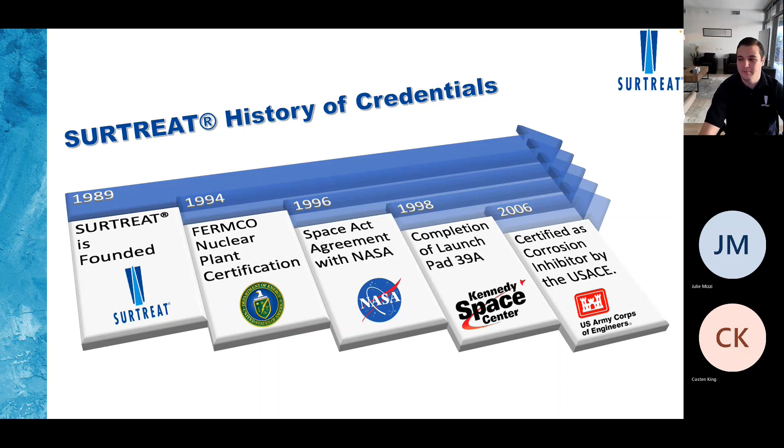Then in 1996, we started working with NASA through the Space Act Agreement, which led to the completion of Launchpad 39A in 1998. A few years later, we started working with the Army Corps of Engineers to develop a corrosion inhibitor based on the technology used through that Space Act Agreement with NASA.

That same year, we started a 10-year study with NAVFAC at the Okinawa-Kadena Air Force Base. That would be the foundation for us getting into the UFGS specification.

In 2010, we started working with the New Jersey DOT to get specified in the Bridge Preventive Maintenance Program, which is what we're going to be discussing today. We also got our international certification in the European Union in 2011.

After those 10 years and the results of that Okinawa 10-year study, we were included in the UFGS as the only system that can meet the surface applied corrosion inhibitor guideline. In 2019, our founder Bob Waldy worked on an ICRI committee, and currently we are the only three-part system that can meet that surface applied corrosion inhibitor guideline.

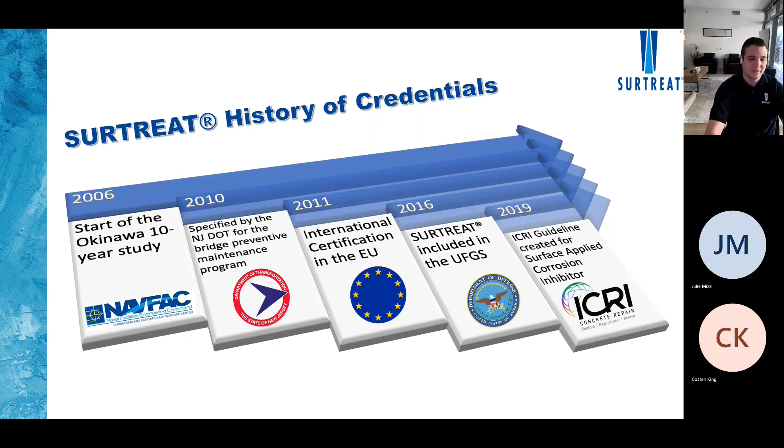So this is our story. Now I'm going to tell you what makes us different. What makes us different is that, like I said, we're a turnkey solution, chemically based approach to life extension of concrete.

So when we have a project, we look at what the problem is. Then based on that problem, we create a diagnosis, which will lead into us developing a solution. We'll design a solution for that specific problem, then we manufacture it based on the solution that was designed.

We provide all the on-site inspection and all the training necessary so that the solution gets installed properly. We do the testing and monitoring after it's installed to verify that the performance was met. All of these steps lead to the structure being healthy and the concrete being healthy, and this is why we can ensure the life extension will happen.

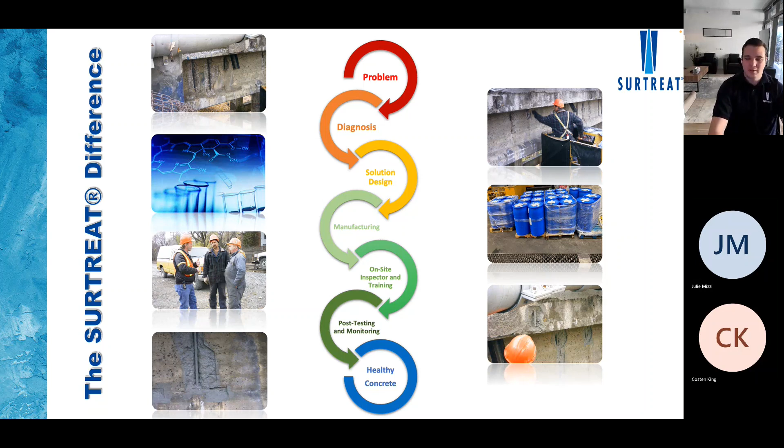Now let's talk about what's going on with bridges and infrastructure in general. It's clear that our infrastructure is in need of rehabilitation. The Federal Highway Administration posts a report annually. The most recent one shows there are 4,783 structurally deficient structures. Structurally deficient structures are a big pain for the Highway Administration.

They estimate it would cost $16 billion to rehabilitate those 4,783 bridges. This is not even replacement - if they need to replace them, that would be $24 billion. So they need to spend at least 68% of what it would cost to replace them just to get them rehabilitated and out of that structurally deficient status.

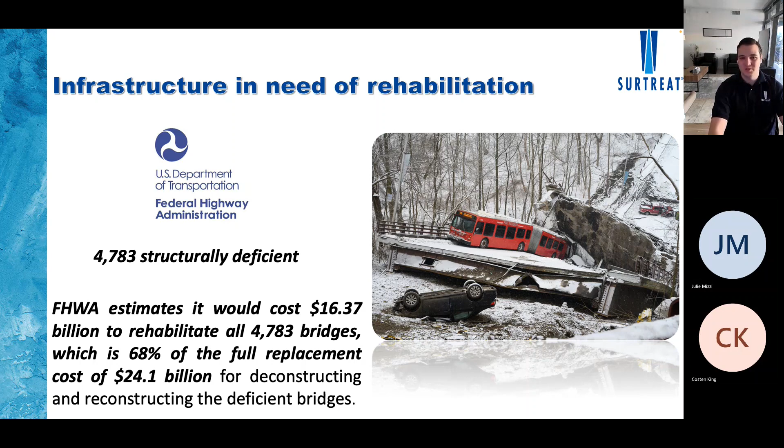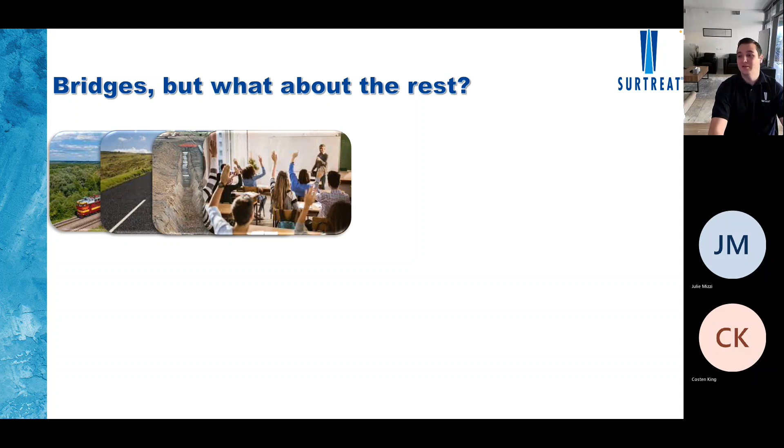Now, that's only bridges, and it doesn't even include the cost of rehabilitating bridges maintained by states and localities - just national bridges. It doesn't include railroads, highways, pipelines, schools, public works, pipes, ports, dams, public buildings, or airports.

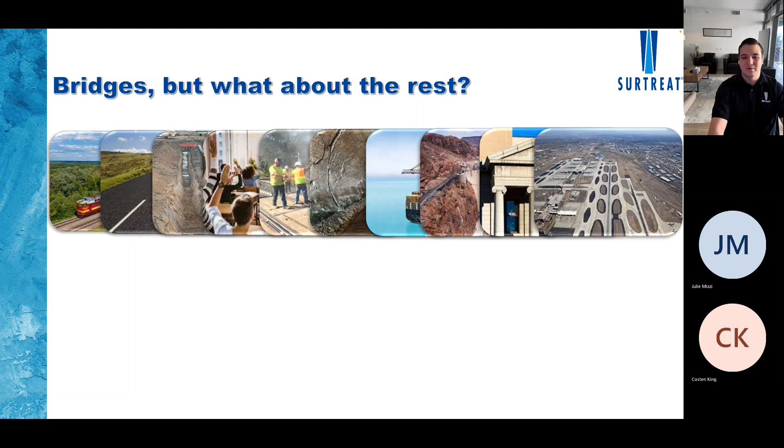And that is why the American Society of Civil Engineers assigned us a grade of D plus on the nation's overall infrastructure. So we have a long way to go, and it's going to take a lot of money.

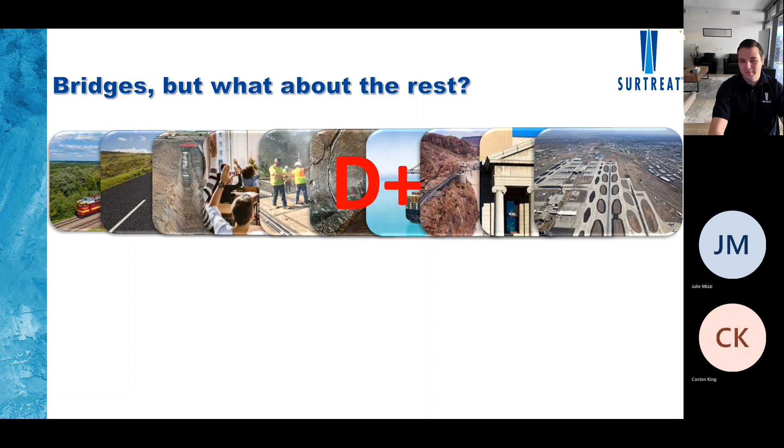That same organization, the ASCE, estimates that we need to spend $4.5 trillion just to get the infrastructure going. According to some Harvard economic professors, and actually the former Secretary of the Treasury, Larry Summers,

there's an estimation that the state of the infrastructure right now is costing households 50 cents to $1, like a tax per gallon of gasoline, just because of traffic and extra repairs. According to the ASCE, it's costing us $3,400 per year on auto repairs, extra gasoline, and time stuck in traffic. So it's not only hurting commerce, it's not only hurting the cities.

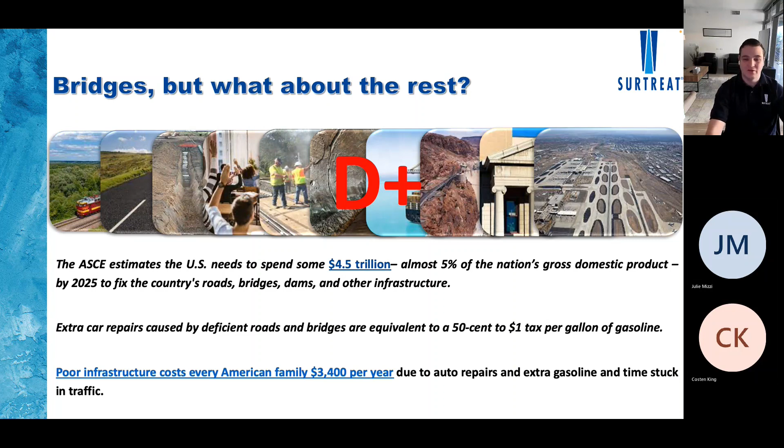It's hurting people, regular people. Now, why is this happening?

The main cause of concrete deterioration is corrosion of reinforcing steel. When reinforcing steel starts corroding, the corrosion creates tensile stress on the rebar and on the concrete. As the corrosion expands, the concrete gets that expansive tension and starts cracking and delaminating. Once that happens, it spreads throughout the rebar.

Once concrete has been deteriorated by corrosion, it's going to take more time and more cost to repair. It's important to know that if corrosion is present in concrete, the concrete is compromised.

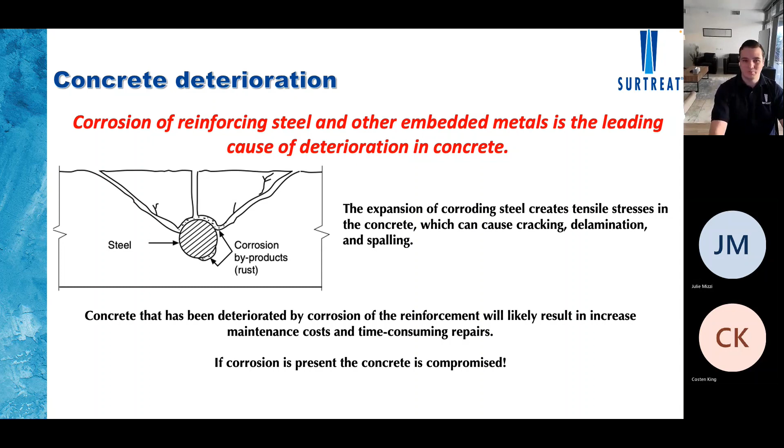To this point, what we've been doing is just patching. We see a spot that's corroded, some spalling happening, and we just patch it and think it's a repair. But this couldn't be farther from the truth. What's happening is that you're putting a new patch, new concrete with high pH and nice reinforcement, alongside corroded rebar or bad concrete that's contaminated with chlorides.

What's happening is that corrosion on the sides or in different areas migrates back to that patch, so the cycle is repeating. Unless you treat the corrosion occurring in the rebar, you're going to have the same problem over and over again. And this is going to lead to increased costs.

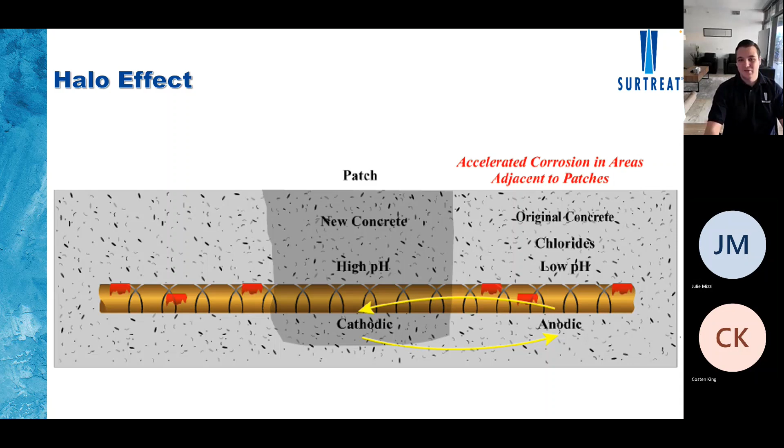One example of replacement versus trying to treat the underlying condition is the rehabilitation of the Washington Memorial Bridge. This bridge is steel, is concrete, is everything that we can treat. When a structure like this is left for a long time without proper maintenance, without treating the underlying cause, you get to a point where you have to do a big replacement project, and that costs time and money. In this case, it cost 3 years of disruption and a $227 million bill.

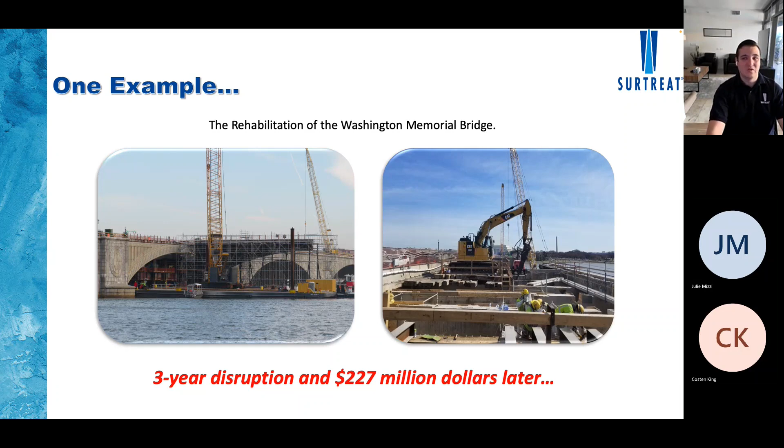It was closed, only one sidewalk, one lane for traffic for 3 years, disrupting morning and evening commutes. You can see it's a very, very significant project.

Now, I'm going to paint a picture. Imagine if we could have done this in 3 months and for a tenth of the cost. How do we do this? Well, we do this by not having to take down the whole structure and then putting it back on.

Because again, we're a surface applied, chemistry based approach, not a band-aid. We're not going to take the same amount of time. We're time efficient because it's a migrating technology. We migrate through the concrete all the way to the reinforcement. You don't need heavy equipment or heavy machinery, so it's cost efficient. You don't need to bring in new concrete, so it's environmentally friendly.

With our products and technologies, we can do as many as 10 other bridges for the same cost that the Washington Memorial Bridge took, and we can do it at a fraction of the time with much less traffic disruption. So let me explain how this technology works.

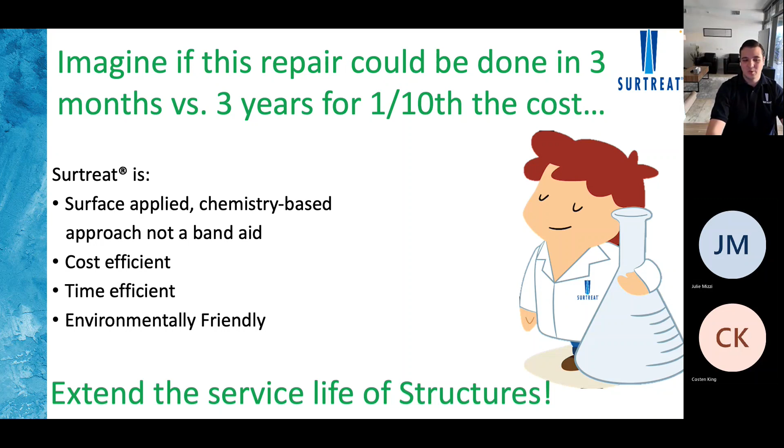Our technology works because concrete is very porous, which means that chlorides, air, acids, water, and other chemicals are able to permeate through the gel pores and microcracks all the way to the rebar. They settle in the rebar and around the rebar, which causes the pH to drop.

Once the pH drops, you lose that passivating film on the rebar that's protecting it from corrosion, and it starts to deteriorate. The environment around the rebar starts to deteriorate. The corrosion starts setting in, starts delaminating that concrete, and eventually you get those big spalls and delaminations.

So what we do is migrate through the concrete, through those same gel pores. The first thing our product or solution does is regenerate that passivating film, taking that active rust that's in the anodic stage and making it non-reactive, making it inert.

Then our technology also migrates through the gel pores and starts binding with the free calcium, which displaces any contaminants, acids, water, or chlorides that are there. It also turns those chlorides into an inert state so they're no longer water soluble. Once you do that, you basically prevent the process of the pH dropping again.

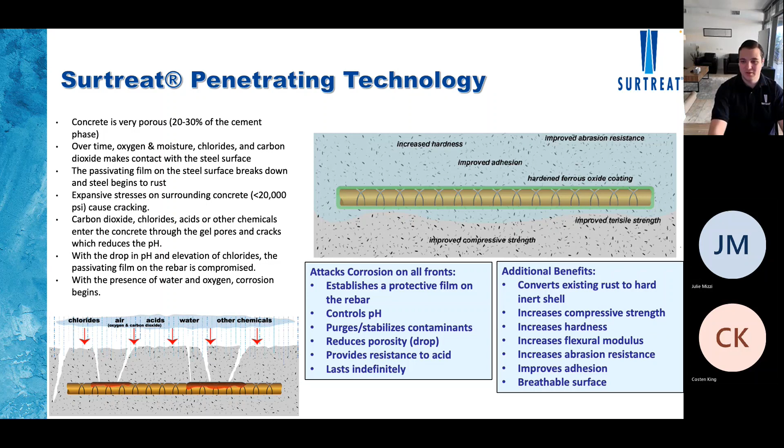Now, why is this important? What's important to extend the service life of structures? If we have a current structure that we're working with, and we take it down and rebuild it, the same thing is going to happen again. If you don't protect that structure, same thing. But what if I tell you that we can protect the current structure and make it better, so you don't need to do demolition?

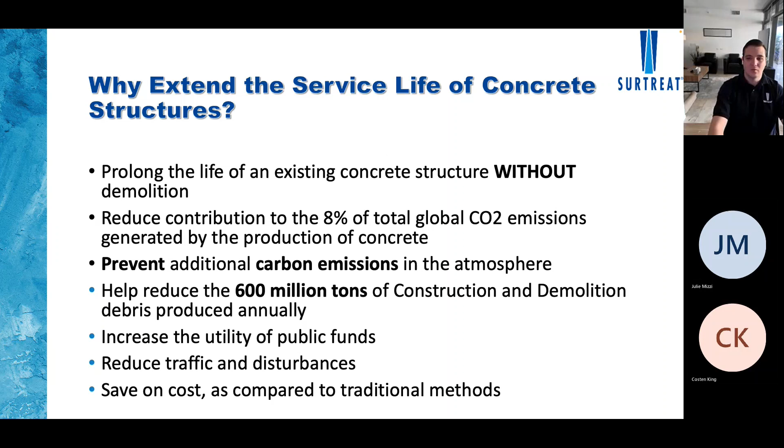You will also increase the utility of your public funds because you'll be able to do more bridges faster. You will reduce traffic and disturbances because our system is non-invasive, and you will save on cost compared to traditional methods. So an example of this cost saving, I want to take you back to this study that the US D.O.T did in 2017.

They studied the difference between replacing and repairing bridges. They took basically all the bridges that are in the NHS, which is a national highway system, and the non-NHS system that are structurally deficient. That means that they are in need of repair within the next year or two. And they found that overall, repairing is 32% cheaper than replacing.

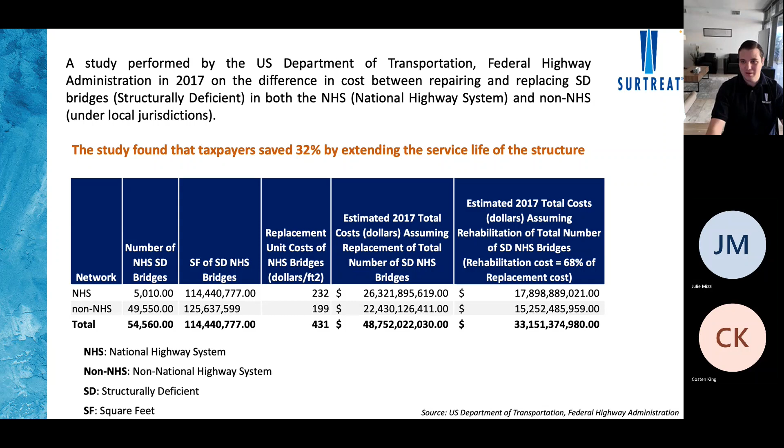Obviously, right? But what if I tell you that there is even a cheaper way to extend the service life indefinitely? Those repairs will be effective. You will be indeed repairing the structure, and you can make it even cheaper than what they estimated, so you can bring a higher benefit to the taxpayer.

These are just some case studies where we compare what the engineer recommended would cost versus what it actually cost us to repair that structure. It goes from 60 to 80% savings, which is significant when you think about it in public funds.

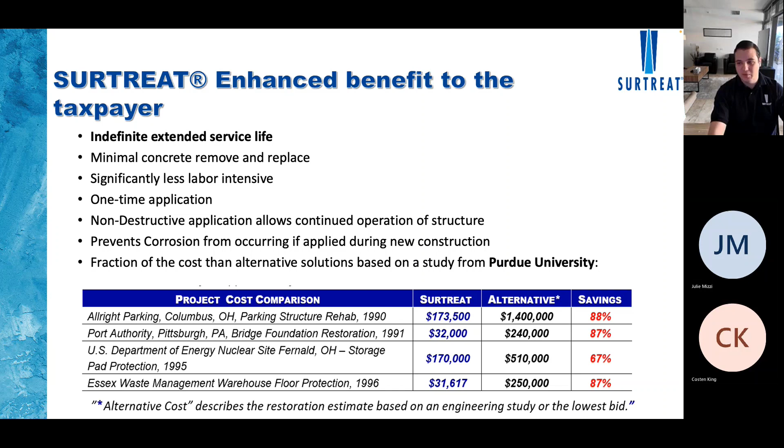So let me walk you through that UFGS specification that allows us to work with Department of Defense. That was the 10-year study that I mentioned at the intro of our presentation.

This basically, after 10 years, demonstrated that there was an average reduction in corrosion rate by 80%. But what this means is not that we reduced the corrosion rate by 80%. It means basically that we reverted the current process of corrosion. At the point where we were able to get this study after 10 years, it proved that there was no corrosion occurring. So that's what got us into that UFGS specification, and that's why we're the only system that meets it.

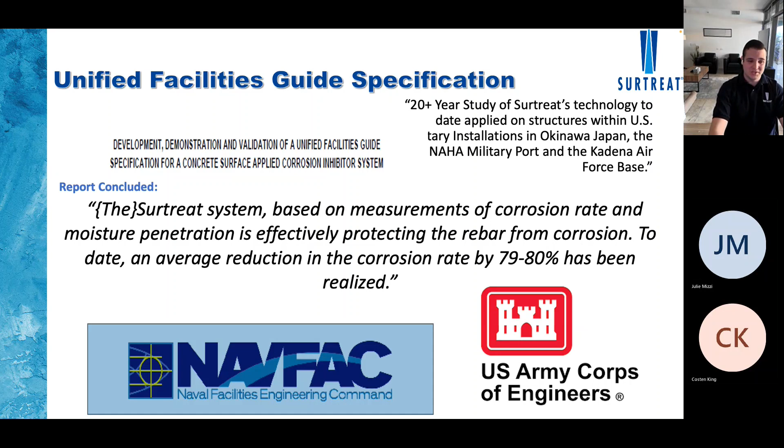And at the end, we're going to discuss some of the projects that we've been doing with that UFGS.

This is also our ICRI guideline. This is very important as you are looking into bridge deck and maintenance programs, because this is the only true way that you can, even before you do any repair, before you do your concrete repair, before you do FRP, before you put pavement again, make sure that the structure is clean, that the structure is healthy, and that the structure is not going to continue to deteriorate. This guideline is critical for people specifying our products, because it tells them exactly what they need to do, how they need to do it, and the performance required. You'll see that our solutions are the only ones that can meet those performance requirements.

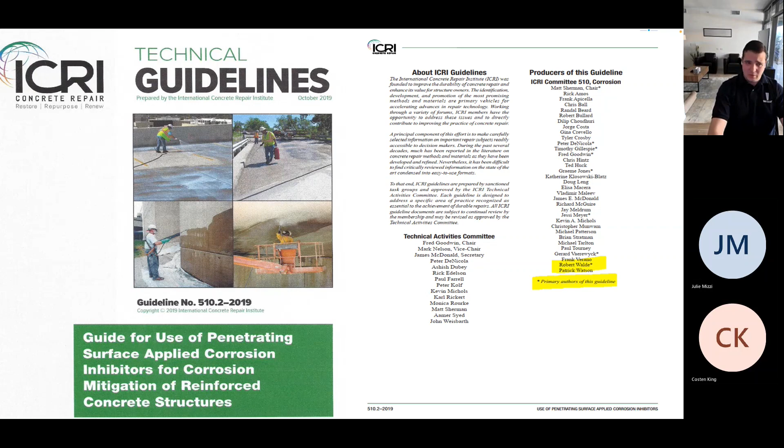So after this introduction of the problem and the current state, let me walk you through the New Jersey D.O.T maintenance program, which is one of our success stories in this bridge maintenance program.

New Jersey D.O.T has 39,000 miles of public roadways, 3,000 miles of state and U.S. highways, and 500 miles of interstate highways. They have so many structures, and they started this maintenance program when they realized they needed to develop something that was going to be cost effective in the future, and not necessarily break the bank every time something happens. So it was created in 2007 using state funds, and in 2009, the FHWA took notice of the efforts and expanded it to be a federally funded project.

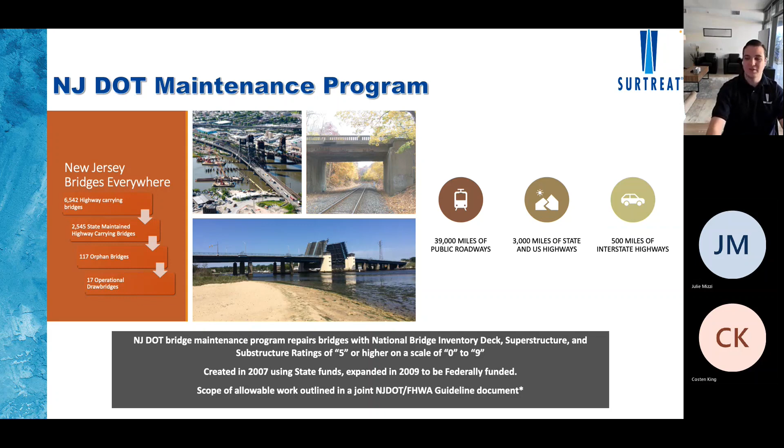Now, what they do is repair bridges that, within the National Bridge Inventory deck, superstructure and substructure, have a rating of 5 or higher on a scale of 0 to 9. So things that need repair within the next 4 years. Because of their involvement with FHWA, since it's federally funded, this scope is allowable work outlined in a joint New Jersey DOT and FHWA guideline document.

So the work we've done preventing corrosion has been significant. We've been able to reduce work orders, patching and potholes and all that, from 20,300 to 5,100. We've done over 400 structures, which is over 4 million square feet.

For those of you wondering how easy it was to install, this is how easy it is. All you need to do is make sure you get the right square footage so you get the right deal. It takes one lane, the other lane can stay open. Simple as that. You'll see cars passing by while you're effectively extending the life of your structure.

Now I'll tell you a little more about the story with New Jersey DOT. Our partnership with New Jersey started in 2003, when Surtreat began a testing program for 4 bridges that were to receive deck treatment. We started with non-destructive core testing before and after Surtreat, and sent those results to the University of Florida, where they analyzed the results before and after. We left control areas untreated in the deck just to measure the change.

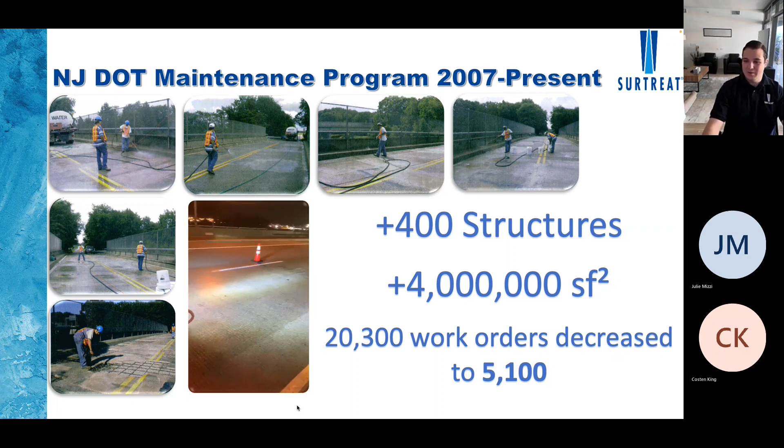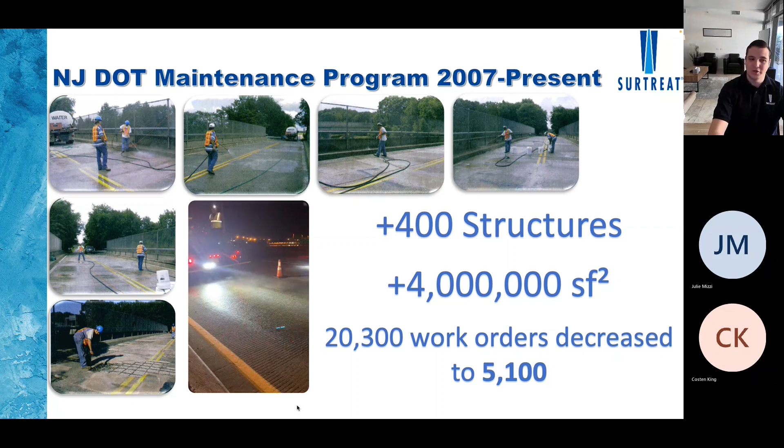The test results indicated that the application of Surtreat had a notable positive effect on the properties of the concrete deck. It increased the strength, decreased the permeability, and decreased the corrosion rate of the structure. These 3 factors are what allow us to say that we effectively extend the service life, and that our products are permanent. Once you change the chemistry of the concrete, there's no coming back. You can't damage that. The porosity is closed, and no chlorides can come in. Because no chlorides can come in, the corrosion rate can't revert, because you already have that passive state on the rebar. So there's effectively no way of returning to what was occurring in the past.

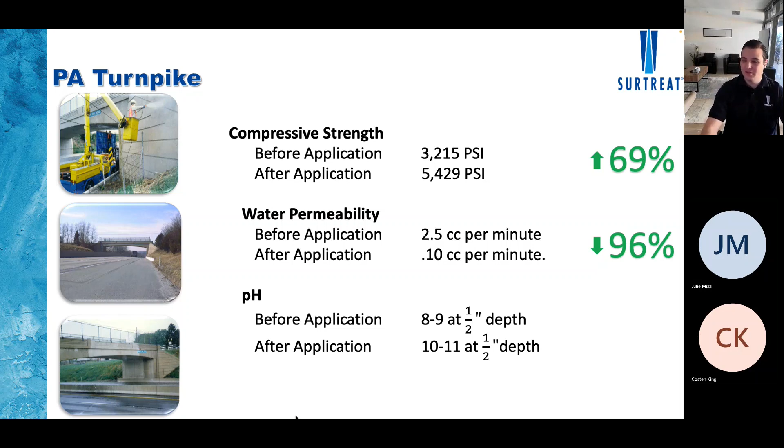So, increasing compressive strength by 69%, reducing water permeability by 96%. That's porosity, the thing that allows chlorides to come in and damage the concrete. And it increased the pH from 8-9, a corrosion-active state, to 10-11, a corrosion-passive state. So basically at that point, the rebar cannot corrode.

This is a more recent case study, from last year, where PennDOT had a bridge that needed FRP reinforcement. For those who don't know, FRP reinforcement is a surface-applied structural reinforcement that adds capacity to a structure. So if you need to increase loading capacity, you can apply FRP, but FRP has certain parameters. You cannot install FRP on a structure that has under 200 psi pull-off strength. You need to ensure that whatever is happening underneath the FRP, the structure you're repairing, doesn't have corrosion, because if it has corrosion, it'll still deteriorate, it'll pop, the spalling due to corrosion will pop out the FRP.

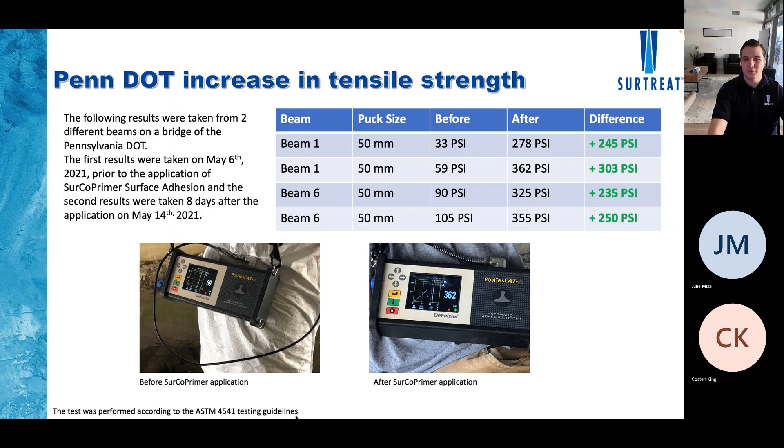So we needed to treat that. We applied it on 2 different beams, using our Surtreat technology, our SurCoPrimer, and after the application we saw increases of 245, 300, and 250 psi, which then allowed the structure to be repaired with FRP. So there are many benefits to treating the structure. Like I said, if you have a healthy structure, any repair you do will result in a good repair. You have to make sure the structure is healthy before you even think of repairing it.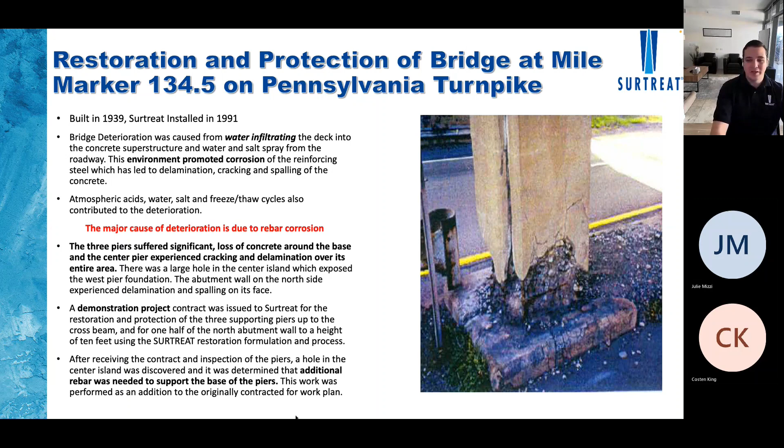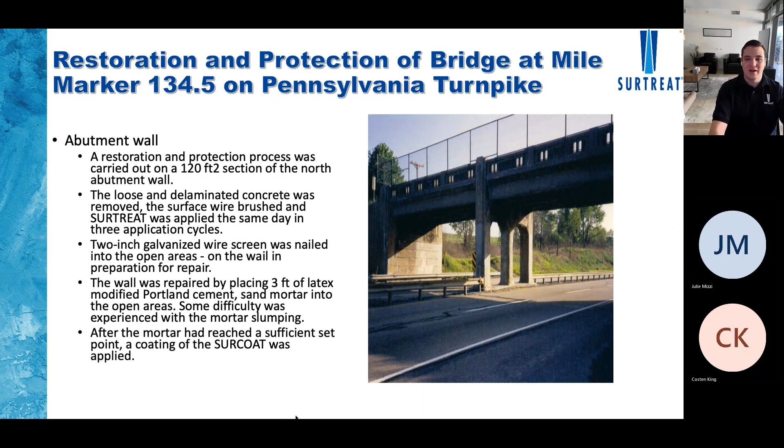So what we came up with is a latex modified cement repair, which gives us corrosion protection and also the benefit of a structural finish at a fraction of the cost. We did the abutment walls, we did the piers, and this is an image of how it looks. This structure not only looks like it was repaired with normal concrete, but it has the added benefit of the Surtreat, which will stop the corrosion.

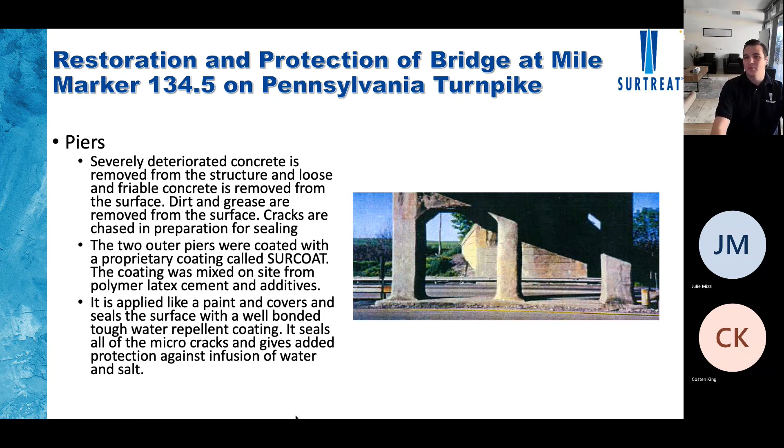We also have another bridge in Texas where we were able to decrease the water permeation to a point where it was completely sealed. We also reverted the corrosion that was occurring. So you had a corrosion active state on the rebar, and with our products we were able to revert it to where there's no corrosion occurring.

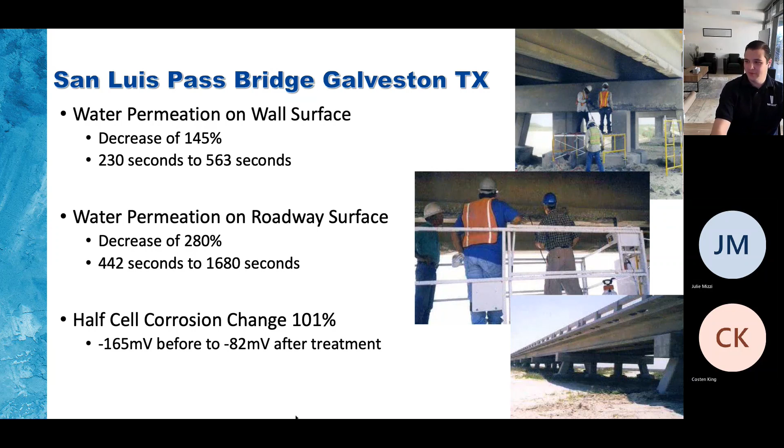We also worked with the New Jersey Highway Authority. This is another project where, again, we increased the pH to a point where it's corrosion passive, so there's no corrosion that can occur.

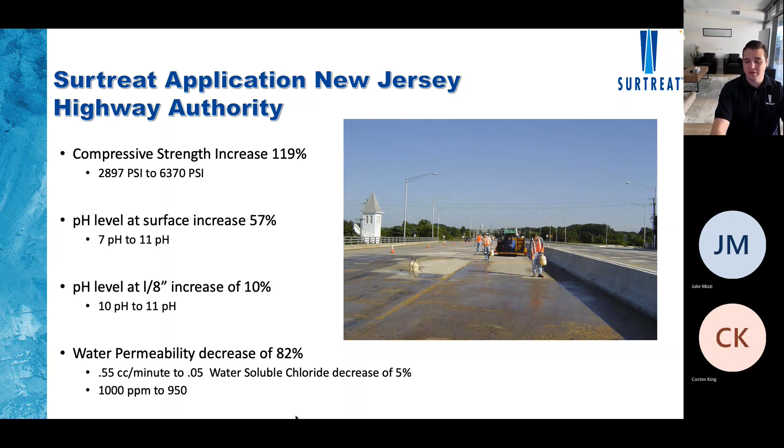I also want to show you a few projects that are not highway related, but are also very important because they're part of our history. NASA, I think, is a turning point for us.

And this is how Surtreat started. As you can see, we reverted the corrosion process, and this is the inception of Surtreat.

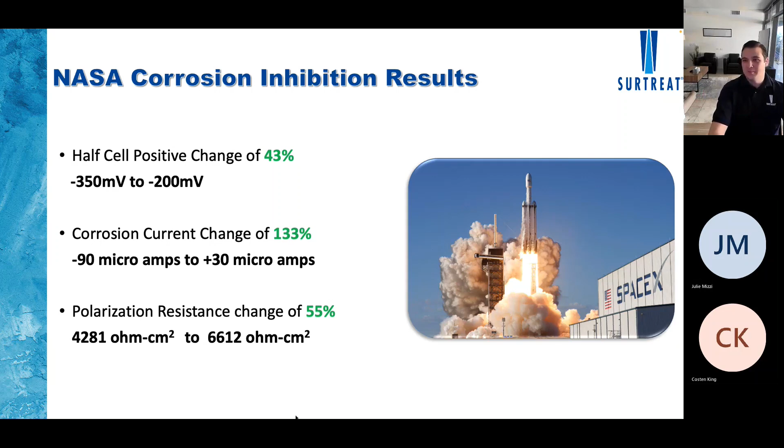Most recently, we also worked at a pier. This was new concrete that was not cured correctly, and there were some chlorides coming in. This was for Massport. We treated it—as you can see, there were some micro cracks that were allowing water and contaminants to be driven down. We treated the structure back in 2019, and there have been no complaints. In fact, we're still working with Massport to get this into more structures.

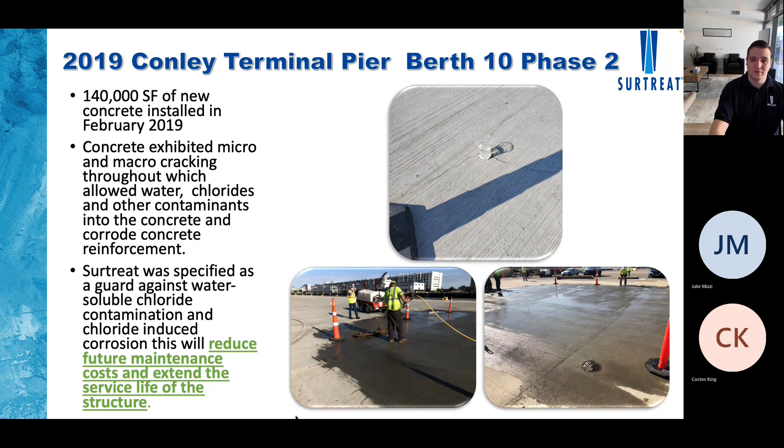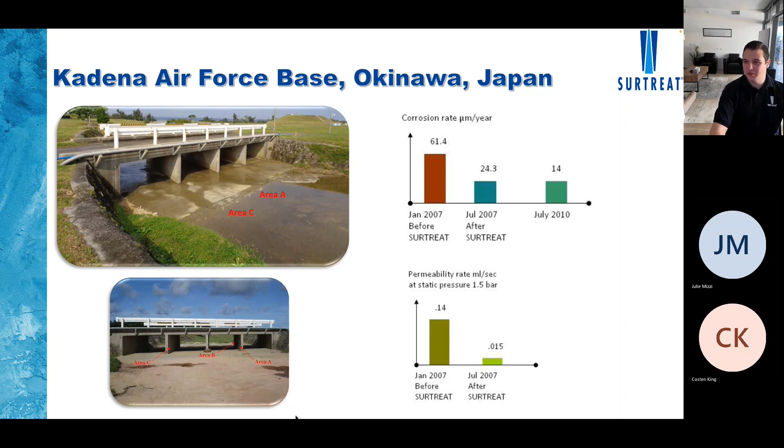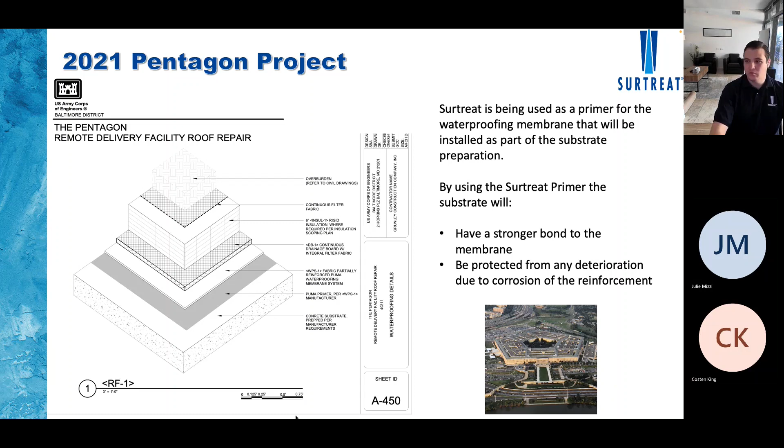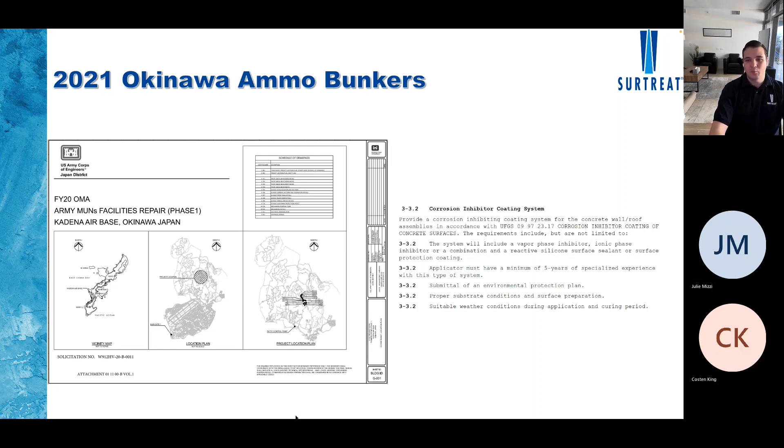We've worked with the Pentagon, similar to the Circle Primer for PennDOT—the same solution, but for waterproofing membrane. We returned to Okinawa last year, this year, and next year for a multi-phase project that will treat ammunition bunkers with the same solution. We've worked with Loureiro to get into the same UFGS specification for a waterproofing corrosion inhibitor.

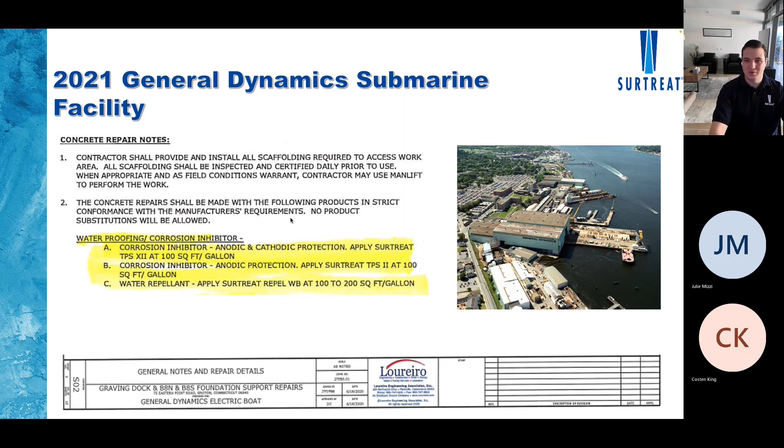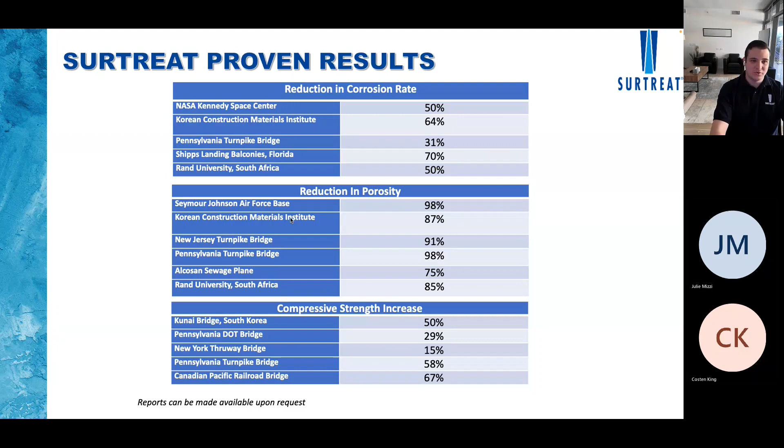And what I like about this specification is that they don't allow any product substitutions, because our products have been tested for 10 years—so why change something that works great, right? I can show you many, many studies. We've worked nationally and internationally on bridges, military bases, airports, dams, you name it. So if any of you need a specific report or have a specific case, please contact us and we'll make sure to give you the information you require.

To close up, I just want to highlight the benefits of our solutions. We're an enduring, permanent solution. It's not going to deteriorate, you don't have to reapply it. We're changing the chemistry of the concrete. It's effective because it treats the underlying condition of the structure—the deterioration of the concrete and the reinforcement.

It will give you a healthy structure. It's efficient—it doesn't take a lot of time, a lot of equipment, or a lot of money. All you need is a surface-applied application. It's environmentally friendly, a water-based solution. You reduce the amount of new concrete you're generating, which reduces the CO2 emissions of concrete.

And it's economical compared to the cost. We've shown throughout this presentation that repairing saves 32%, and if you add that, Surtreat saves 60 to 80% of the cost of traditional repairs.